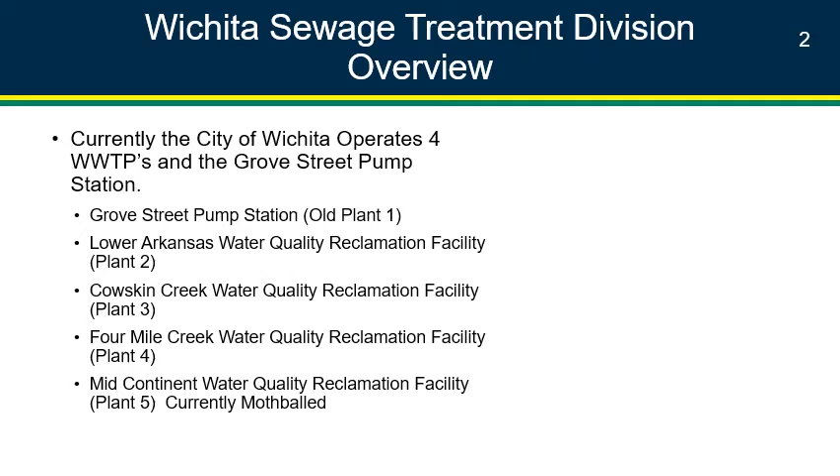So I wanted to give you an overview of our collection system and our different plants. If you look at all this green area, that is the collection system that comes down to our sewage treatment plant number 2, the Lower Arc facility, which we'll be focusing on today. The reason I wanted to show you the other facilities is this area up here is our Cowskin Creek Water Quality Reclamation Facility. It just got solids dewatering added. Prior to that, we would haul liquid solids and dump it in a manhole in the north part of our collection system, and it would flow all the way down to Plant 2 to be processed.

Out here is our 4 Mile Creek Water Quality Reclamation Facility, and right now we're in the process of finishing up an upgrade to that facility that will include solids handling and recuperative thickening, but we haven't got all that installed yet. So currently we are hauling the solids, or liquids, sludge to our collection system, which is coming to plant 2.

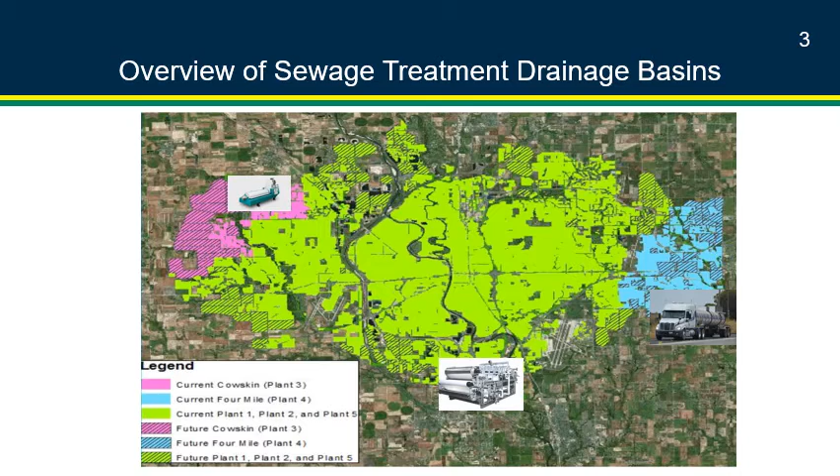In all of our collection system, and this becomes important because Wichita is so flat, we have a lot of miles of collection system, and they're very flat, and all those solids going into the collection system also produce a lot of odors for us that we have to deal with.

Okay, so an overview of the Plant 2 facility. It's designed for 54 million gallons a day flow. We have an average of about 30 million gallons a day. We don't expect it to build out because we're going to more satellite facilities that we can manage a bit more effectively. Our max flow is 62 million gallons a day, and we are a trickling filter plant with extended aeration. Right now, we're only doing nitrification. We aren't doing any biological nutrient removal.

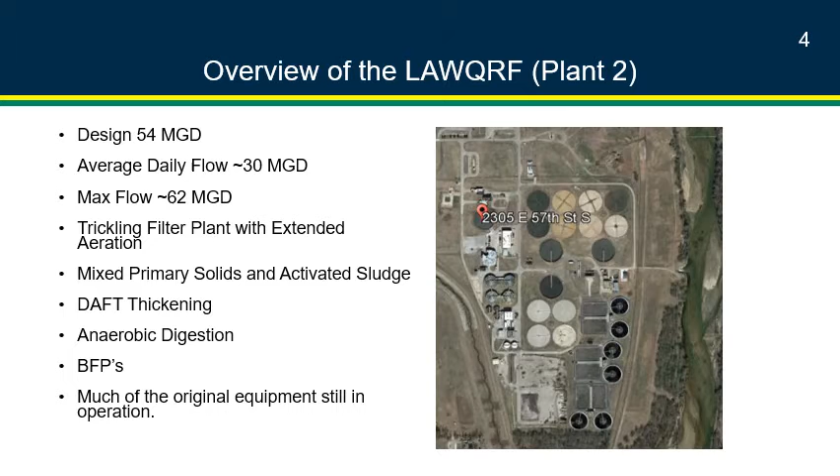And we have a mix of primary solids and activated sludge, about a 50-50 mix that goes to our DAF for thickening. We start out about 1.5 to 2%, thicken to about 6%. Then it goes into our 4 anaerobic digesters, and then it goes across our belt filter presses. Much of the equipment we still have in place, much of the equipment that we're utilizing is original from the 1950s and 60s upgrades.

To give you a biosolids overview of what we have at our facility, we're the main treatment, collection, and distribution system for all of our solids. So we have cities all around the area that either truck cake to us, or they discharge their liquid solids into our collection system, and it comes down to be processed at plant number 2.

We do about 35,000 wet tons per year, which equates to about 5,500 dry tons per year. And we haul about -- in 2017, it was one of our heavier years, but we brought 1,067 end dumps to our farm fields for land application. We have about 30 to 32 tons per truck, at about $5.20 a ton for our hauling costs. So that's about $176,000 a year.

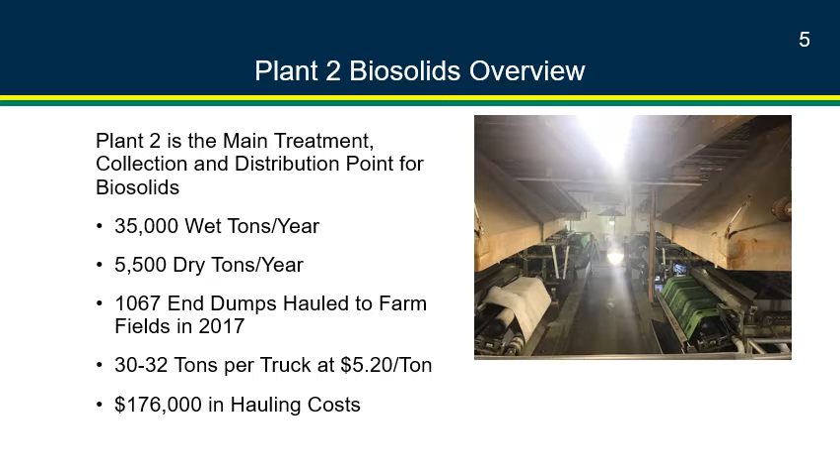We're pretty fortunate because being in a rural area like that, we very rarely haul our sludge more than probably 10 to 20 miles to be land applied. But one thing that's unique about us is we don't charge our farmers anything for it. They have never gone to that, since the inception of the program. So we actually haul it, we spread it, and we disc it in, all for the farmers at no charge. We are relooking at that because it is a large burden on us.

Okay, so obviously Struvite has been an issue in a lot of plants, and Struvite has become a much larger issue for us, especially as our infrastructure ends up aging. We've got some old belt filter presses. We have those nylon coated rollers that the Struvite gets on, and there's really no way to get it off of them besides replacing the rollers.

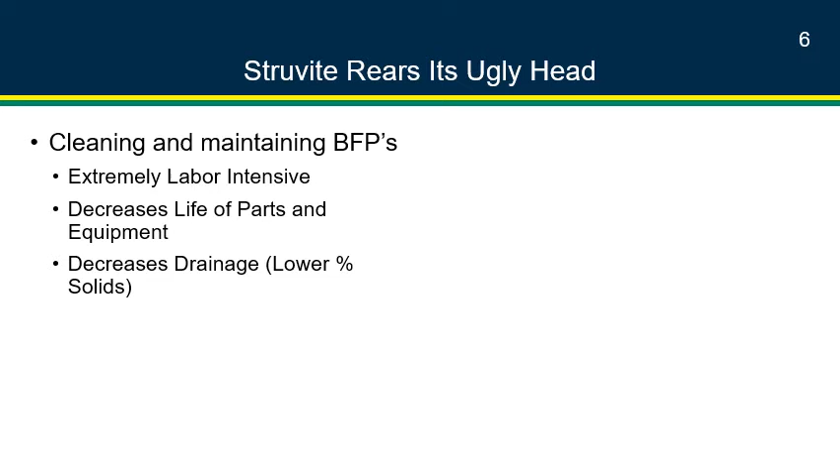So we were looking at options to remove Struvite within our facility. One of the options we had looked at was using ferric chloride to feed into the system. We saw some pretty good results. When we did the trial, the company provided the chemical, the feed equipment, static mixers, and a reaction vessel, which was nothing more than pretty much an air compressor tank that we modified and put some baffles in, plus some technical assistance. We showed a big improvement in our Struvite by binding up the phosphorus, but we also saw a lot of improvements in dewatering as well.

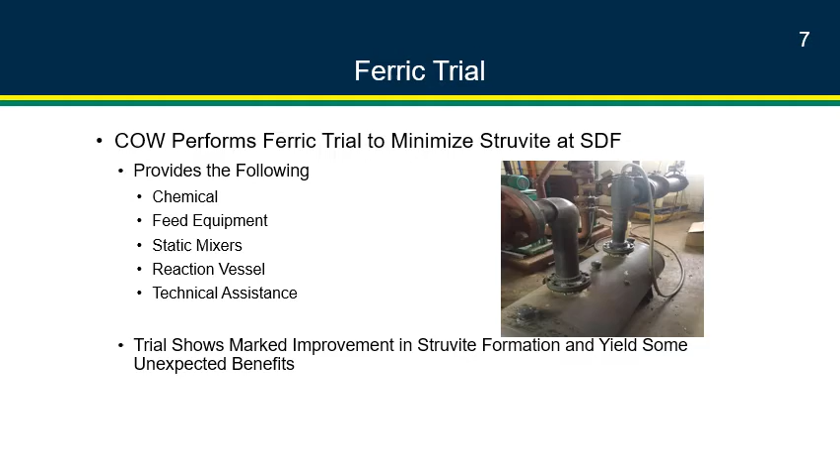With the decrease in Struvite and the ease of cleaning we were seeing, we expected to see that. One thing we did not expect to see is the significant increase in our cake dryness going across the belt filter presses, and we were able to almost double our throughput per press.

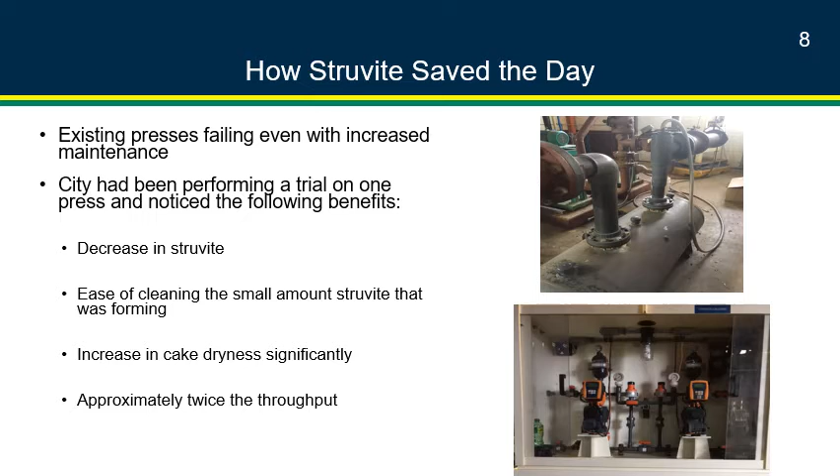We expected to see a few percent solids increase, and a little bit of throughput, but we were able to almost double it. Due to the necessity for the throughput on the presses, we expanded this to all 4 of our presses immediately because we had to keep sludge going through. We had no other way to dispose of it.

Our average gallons per minute across the presses went from 75 to about 140 gallons per minute with only a 30% polymer increase. Right now we're actually using a cationic polymer versus an emulsion, so we're also in the process of doing a trial to see the difference between that.

Our cake solids went from about 18%, and 18 may be generous on that—it more than likely was 15 to 17, somewhere in there—but we were seeing an average of about 23%. And then we saw our phosphorus decrease from about 102 to 14.3 on average.

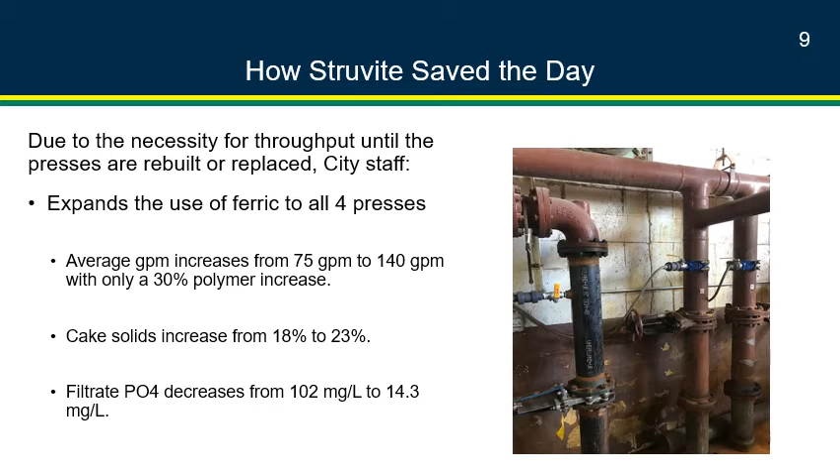So when we put everything together—the percent solids, the decreased amount of maintenance, the throughput—and if we have 4 operating presses, we're able to eliminate almost one entire shift and focus that towards maintenance of this old equipment. We decided that we needed to go ahead and put out an RFP for the contract, and based on the selection committee recommendations, we hired US Peroxide, who's our co-presenter today, as our service provider.

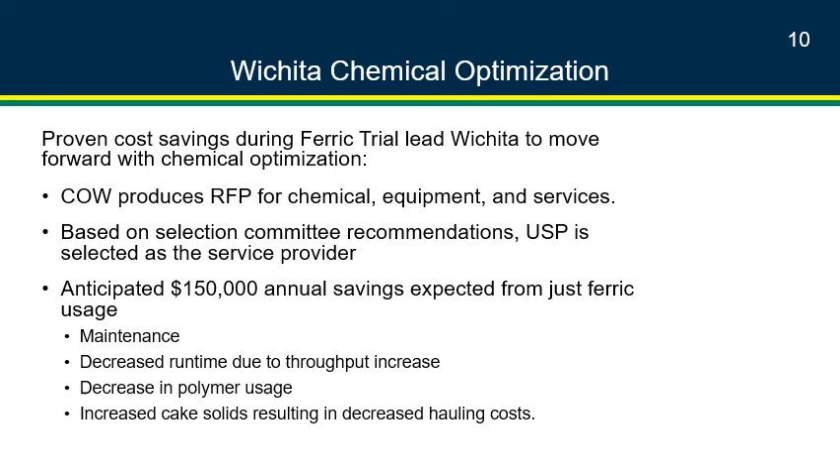We've anticipated that we'll have about $150,000 a year in annual savings from just using ferric and decreasing the polymer dose, decreasing maintenance, being able to increase our throughput, and increasing our solids. We feel like that's going to be very significant for us in the future.

So as Jamie said, they ran the ferric trial. They put out an RFP for Struvite phosphorus removal, leaning towards ferric, and the primary goal, obviously, was to remove orthophosphate. Some of the secondary goals were the increased cake solids and polymer usage. We didn't focus too much on that because we know the science between orthophosphate—it inhibits the solids, and by removing that orthophosphate, we're able to increase the cake solids and decrease polymer usage. So we did, and if I have time at the end, I have a couple slides describing why that orthophosphate is actually inhibiting the flocculation of your polymer.

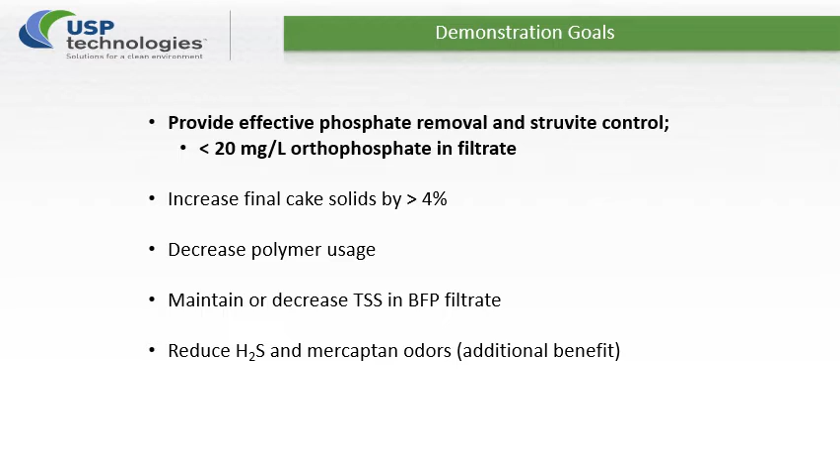One of the added benefits that we saw from the chemistries we were looking at—again, the primary chemistry was ferric, but we were also looking at a peroxide regenerated iron technology—is that both those chemistries have an affinity to reduce H2S and mercaptan odors. That was an additional benefit that was not stated.

So we looked at the traditional approach, ferric chloride. It's been used pretty widely for phosphate control. It's got an affinity for phosphate. It works—it's been proven time and time again.

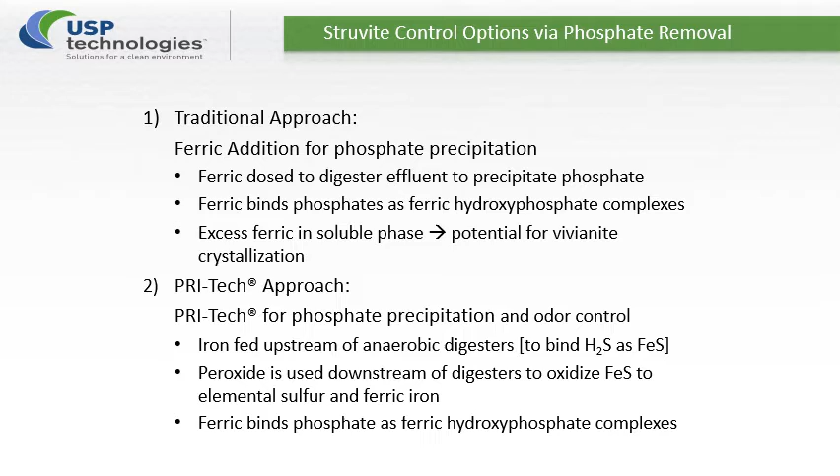We looked at the science behind that, and then we looked at our PRI-Tech approach, which is a peroxide regenerated iron approach. It basically utilizes iron that's either fed upstream or is background, and uses peroxide to free up those iron ions and create ferric iron through that. The chemistries at the end of the day are both about the same—the end goal is creating ferric and allowing it to bind with phosphate to create your ferric phosphate complexes. So that's a little background on why we wanted to look into PRI-Tech.

As Jamie said, they have a lot of odor concerns throughout the collection system in Wichita. They currently feed anywhere from 600 gallons a day in winter months to 1,000 gallons a day of ferrous chloride throughout the collection system for odor control, which all ends up going through the plant and into your solids. So you have roughly 125 to 200, given the season, of iron going into your digesters, and that comes as spent iron, ferrous sulfide. Peroxide has the ability to break that bond and create new ferric or ferrous.

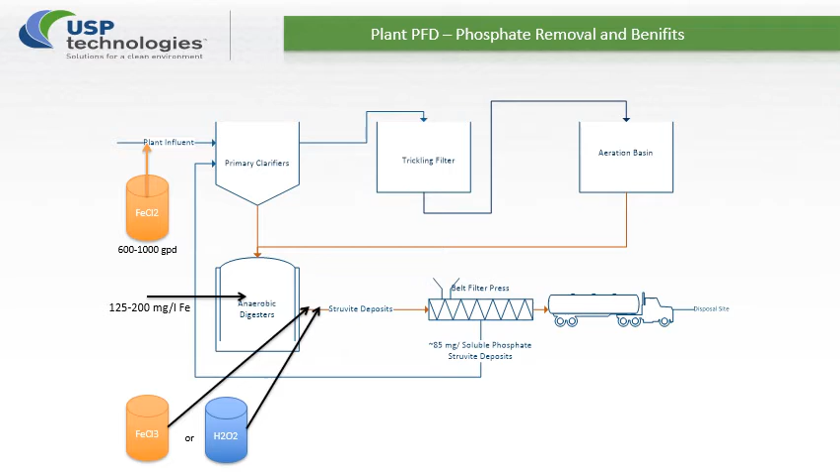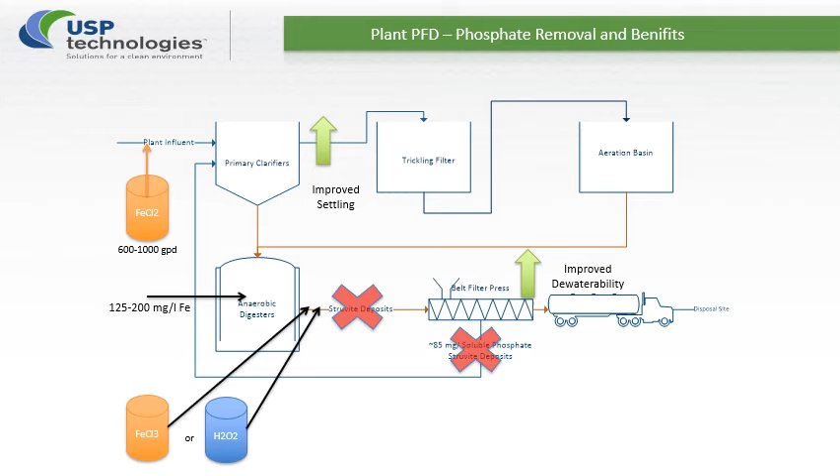So our options here were either to add ferric or hydrogen peroxide post digesters to precipitate out your phosphates, kind of eliminate your struvite problems. Eliminating your struvite problems gets rid of your recycle loop going back to the head of the plant. So you're getting improved dewaterability, but you're also getting added benefits in improved settleability in your primary clarifiers, as well as nutrient uptake in your digesters.

Just a little background on the ferric interactions when you're binding with phosphate. Ferric has an affinity for orthophosphate, but it has a preference to sulfides. If there's sulfides in your stream, your ferric will be consumed 10 parts to 1 part before it is able to start binding with phosphate. So we saw that when we're feeding ferric, the demand was quite high because you had to reduce your sulfides first, or bind with your sulfides first, and then it would go after phosphates.

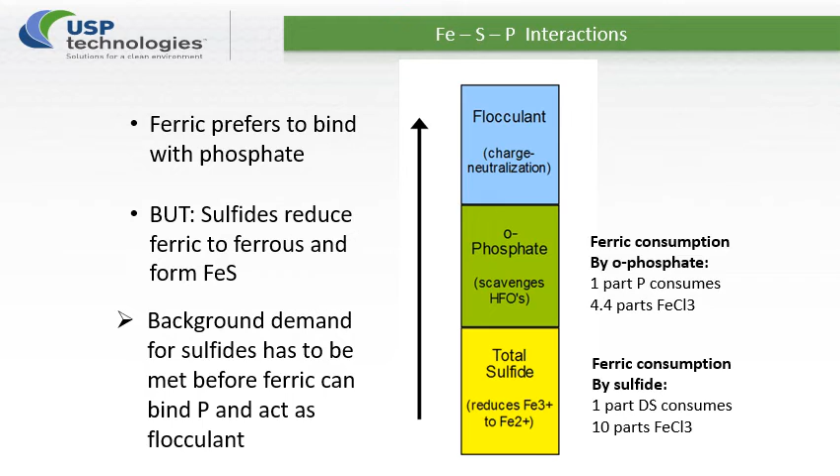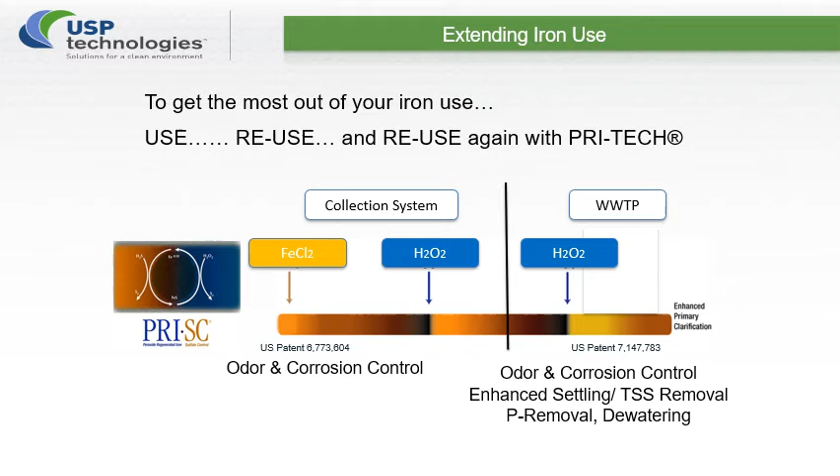So we did a bench scale test to understand the dose rates for both ferric and hydrogen peroxide.

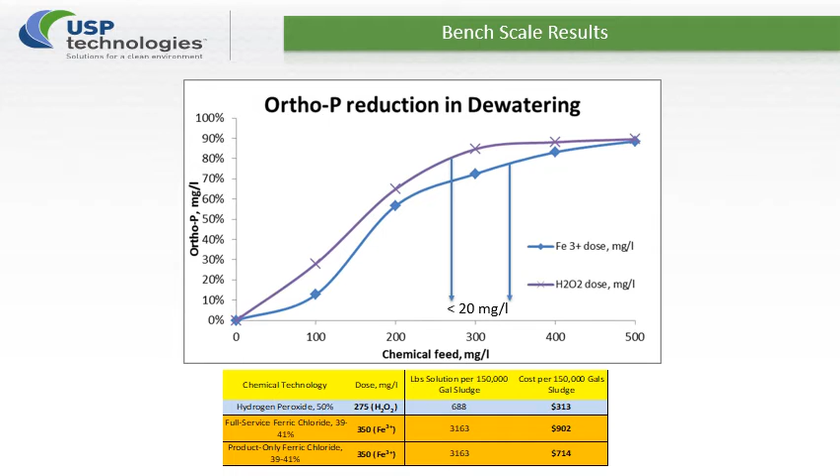The curves kind of land similarly. Don't let that fool you. Ferric on a dollars per pound basis is a lot more expensive than a dollar per pound of hydrogen peroxide. So we determined what the dose rates would be to get less than the 20 milligrams per liter of orthophosphate, which was stated in the RFP. We chose 275 milligrams of hydrogen peroxide, 350 of ferric. That's a little small for you guys to see, but we calculated that by using hydrogen peroxide, you're spending around $300 a day versus a ferric chloride feed, which would be $900 a day - almost 33% of the cost.

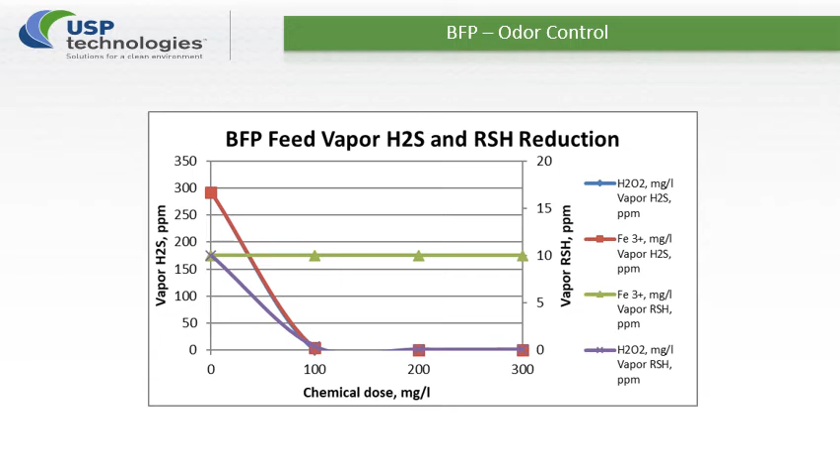The other odor constituent we looked at was mercaptan, and that's your lower graph. So the green - ferric doesn't do anything for mercaptan. Hydrogen peroxide in the presence of iron is actually a catalyzed reaction and creates hydroxyl radicals, which then react with your mercaptan. So with the PRI-TECH technology, we were able to reduce both H2S and mercaptan down to zero. With the iron, it was just the H2S.

So we ended up starting a PRI-TECH trial. We dosed peroxide - September of 2018 was our first trial run, or actually it was our bench scale test.

With the winter months, we had less iron, so we were actually precipitating out less phosphate during those months, but also the phosphate levels in the digestate were fairly low. When we started up the program in February, we noticed that we didn't have enough iron in the system. As you can see, we're only precipitating out 20 milligrams per liter.

So our plan forward, we're working on adding a supplemental iron injection to add more iron into the sludge prior to feeding with peroxide, and that's in the works. We're installing that iron. For the winter months, we're supplementing iron injection to remove a bulk loading of the phosphate, and then the remaining with peroxide, which saves a little money versus just dosing iron itself. You can see in June we have plenty of iron to precipitate out the phosphate, so the summer months there's not as much supplementation.

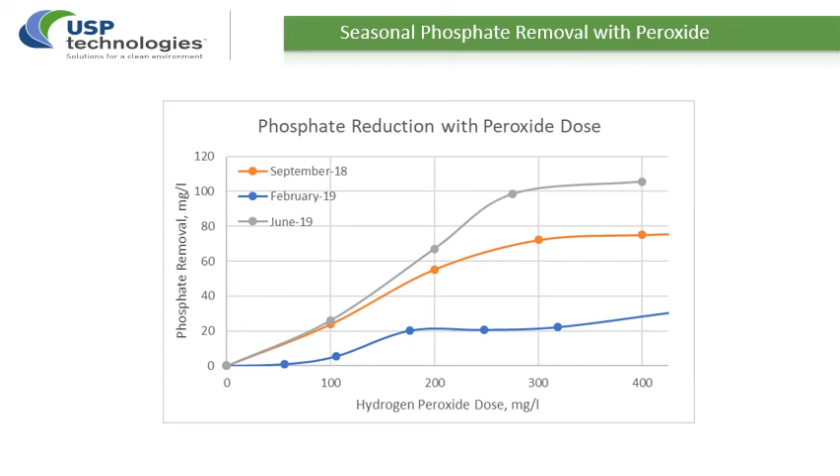So really the conclusion, summer months, which is current to date, we're able to precipitate out greater than 100 milligrams per liter of orthophosphate. As Jamie said, when they did the ferric trial, their phosphate levels were about 103, and they reduced it down to 14. Right now, we're seeing phosphate levels up to 145. So the loading changes based on the sludge coming in, and at times we'll need to supplement with iron.

Current cost today is $313 a day, which is what we proposed. As you saw in the February graph, we have a lot less iron. So if we were to supplement, worst case scenario, about 150 milligrams per liter of iron, and then regenerate the rest with hydrogen peroxide, we're looking at a max cost of the combined technology of $600 a day. Whereas with the ferric technology, you're looking at $900 a day on a good day.

So an added benefit to the PRI-TECH, iron is trending upwards. I think in the past year or so, iron's gone up about 30%, and it's going to continue to go up. So long-term savings is significantly higher than what they'll be in the future, or sorry, what they are today.

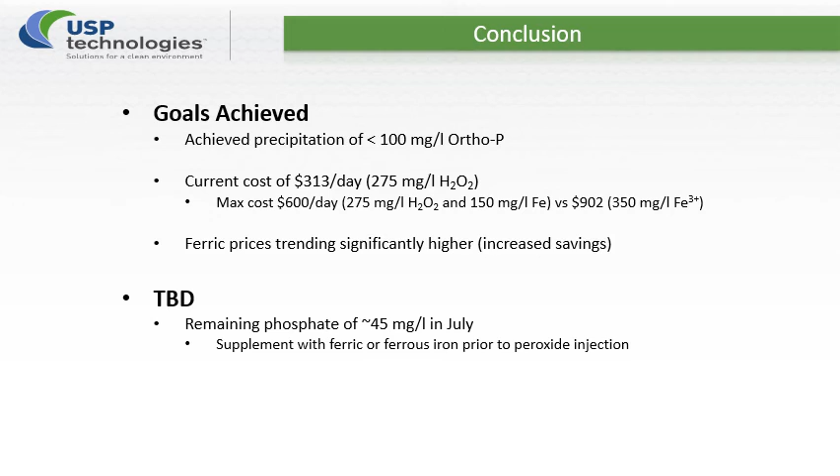Still to be determined. Like I said, we have a little bit higher phosphate concentration in the sludge, so we're looking to supplement with ferrous or ferric iron in the blend tank. This is post-digestate. It goes into a blend tank, and so we'll add ferrous or ferric iron there, and then the remaining would be with hydrogen peroxide.

Jamie did a lot of work with the ferric trial, and they were able to understand that there's significant increases. We see those similar increases with our PRI-TECH program. This session came a little too early for us to compile all that data, but we're seeing that now, and we just need to compile it together. So the technologies are both very similar, but the data is just not there yet for us to present to you today.

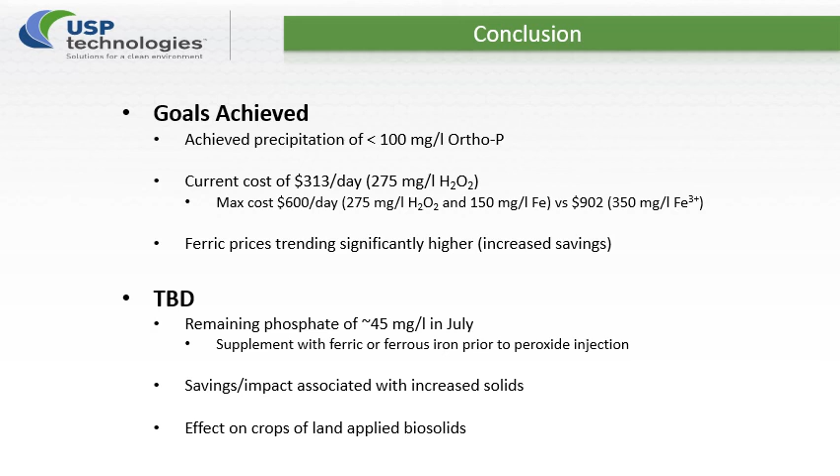One of the great things with the Wichita plant is they land apply their sludge, and it's used for farming. We want to see the impact of this added phosphate going to the sludge and what effect it really has on the growth and the crop cycle. It's not typical that you can just— I think you have a Class B sludge, right? Yes, it's Class B. So it's a nice added benefit that we can actually study what this added phosphate in the sludge would do to the growth of crops, and that's something we're looking at in the future.

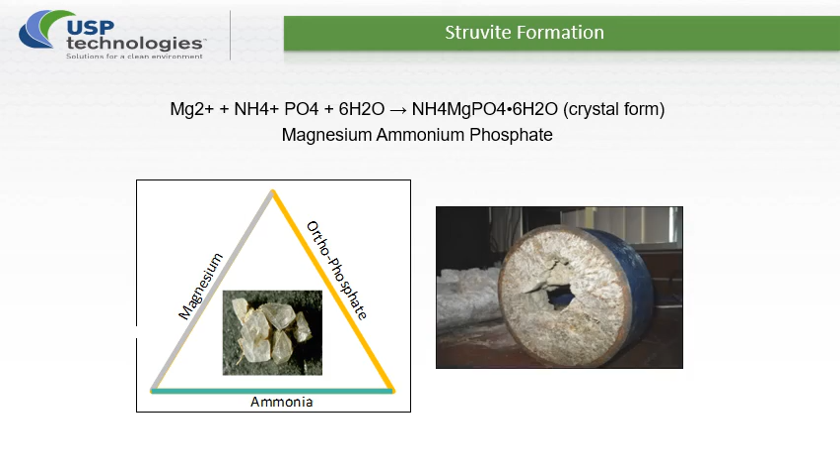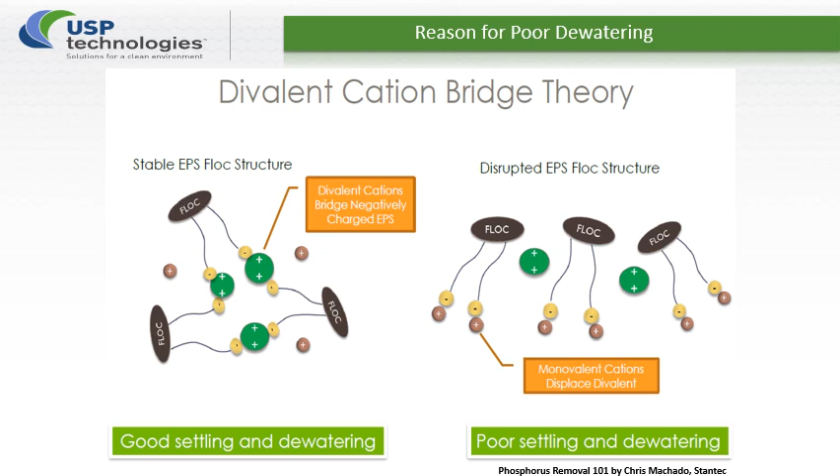So there's the divalent cation bridge theory, where when you have phosphates in solution, it's consuming your magnesium and your calcium. It's causing an inhibition for your floc to settle out properly. By removing that phosphate, you're allowing your cations to float around in solution and complement your polymer. That's why we're seeing such higher solids and improved dewaterability by removing phosphate.